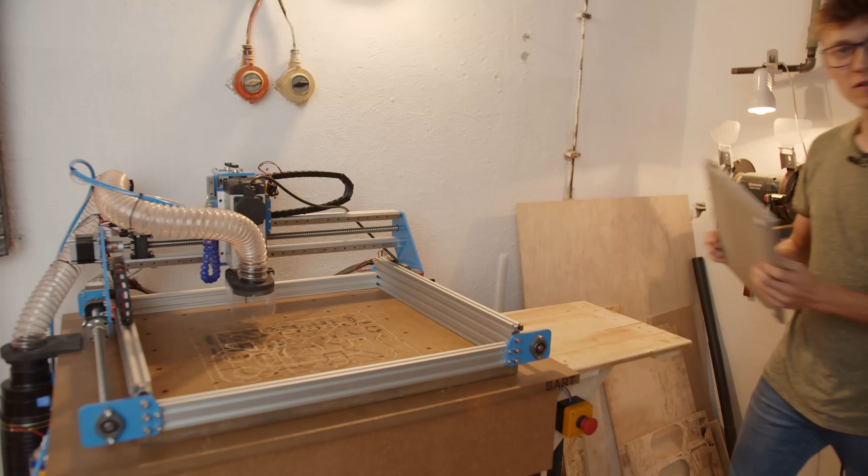A small table for a computer, a WD-40 spraying system, a new huge and powerful spindle, and many other upgrades - that's what I'm going to do in this video.

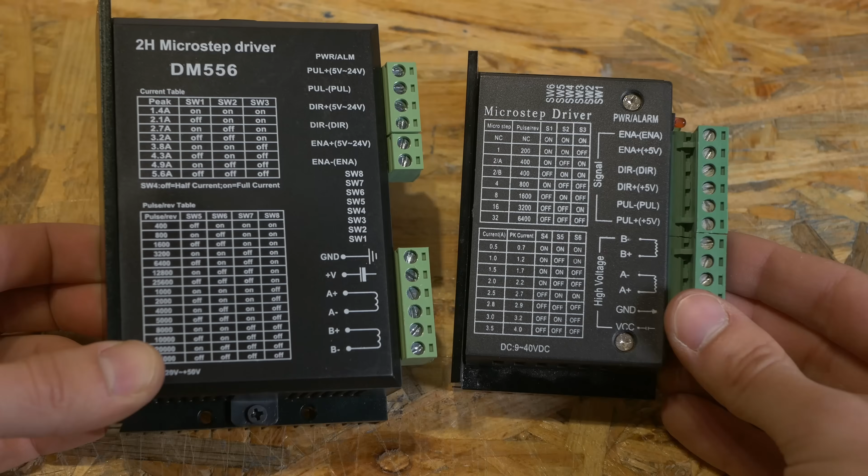All of that started with replacing the 12-volt power supply with 36 volts. A few days after this upgrade, TB6600 drivers stopped working properly and were pretty unreliable, so I replaced them, and after that just started adding a lot of upgrades to IndyMill. That's what I want to share in this video - all those upgrades I added to my machine. I would try to keep this video universal so you can add similar upgrades to your CNC machine, and I will tell you what, in my opinion, are the best upgrades to a DIY CNC machine. As always, you can find all the links to files and things I'm talking about in the description.

I don't really want to get into details why 36 volts is beneficial for a CNC machine and how it changes the behavior of stepper motors, because there is really a lot to talk about. But generally you can use a higher feed rate and also have bigger torque on the motors if you are using a bigger power supply. Of course, keep in mind that the voltage of this power supply has to be compatible with the stepper drivers and stepper motors you are using, and with other stuff on your CNC machine. For example, with these drivers you can go up to 50 or 60 volts, but not higher than that, so 48 or 60 could be a good choice. Also remember that if you have something else powered with different voltage on your CNC machine, you cannot just connect it to 36 volts.

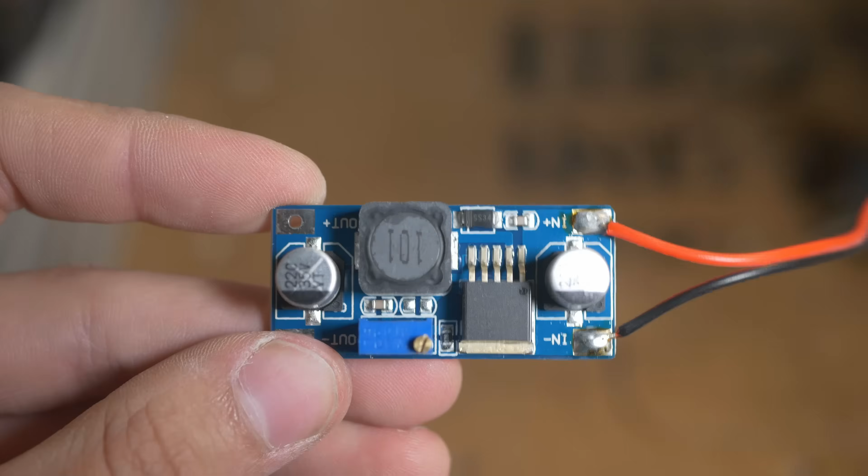For example, I have an LED strip that was connected to the 12-volt power supply, but right now I have the 36-volt power supply, so I added a voltage regulator, and now I can safely power the LED strip and some other stuff in the future.

As I said, 36 volts improves the feed rate and the torque of the motor, so you can run the machine faster. Previously I was running it at 1000 millimeters per minute with the 12-volt power supply, and right now with the new power supply and new stepper motor drivers I can go as high as 2500 millimeters per minute - quite a difference.

I also faced some problems with this power supply after only 3 months of using it. Probably it was connected to the power supply actually being broken, and not me using it improperly - I hope so, because I measured a lot of stuff. I measured the power supply, stepper motors, drivers, and I tried to power the machine with a lab bench power supply.

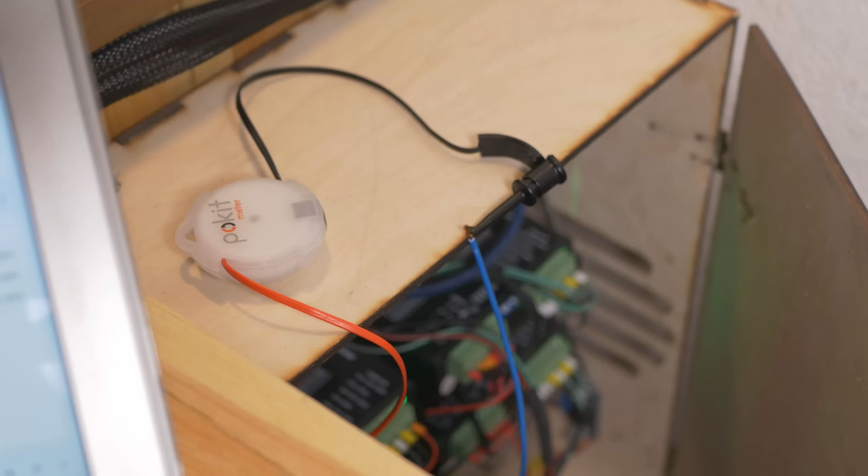Alright, so here you have it on the screen. As you can see, the voltage was almost 36 volts, but once I started machining, it drops to 10 volts and then goes to like 14 and then 10 again - something is definitely wrong with the power supply.

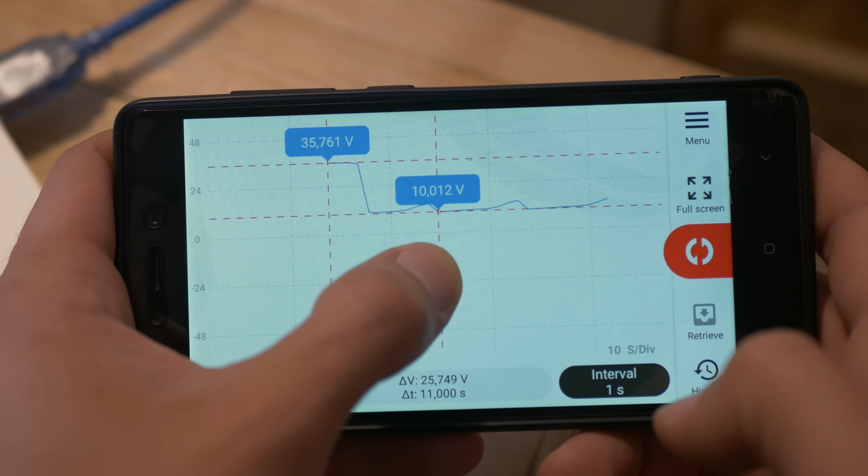So I sent it back to the producer and hopefully they will replace that, but as for now I bought a 36 volt power supply, 16.7 amps, which should be way more than enough for this machine. Previously I was using 11 amps.

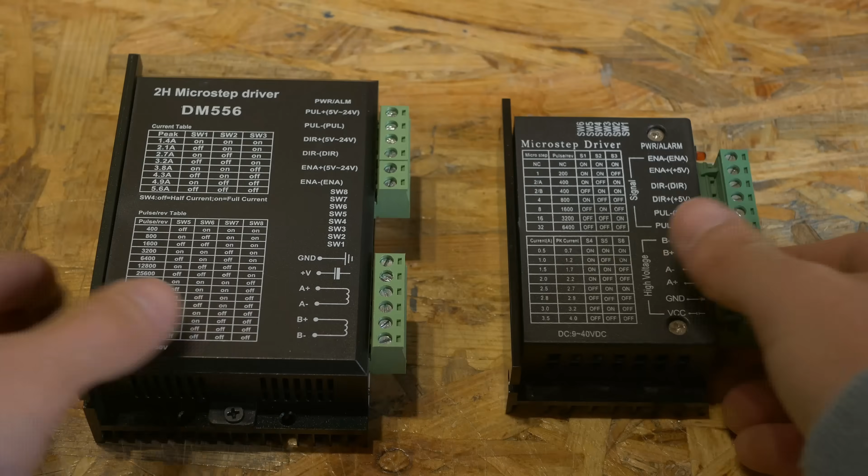For over a year, TB6600 drivers were working fine for me, but right after replacing the power supply, those started to be pretty unreliable and I just wasn't able to use them on this machine anymore, so I replaced them with DM556. Those drivers work fine, they are a lot more quiet.

It is so silent compared to TB6600. So this is the x-axis, and on the y-axis I still have the TB6600 - of course there are two motors so it's a little bit louder, but compare that to the x-axis. The difference is huge, and the connection is basically pretty much the same.

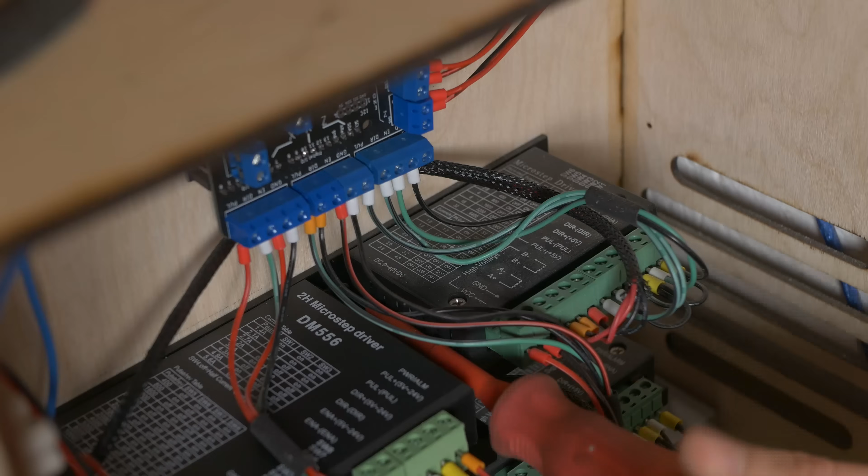The driver is just a bit bigger, so keep that in mind - if you have a small electronics box, that may be a problem. Also keep in mind that this driver can only be powered with voltage higher than 20 volts, so if you have a 12-volt power supply, you cannot use these drivers on your machine. You would also have to replace the power supply together with the stepper drivers.

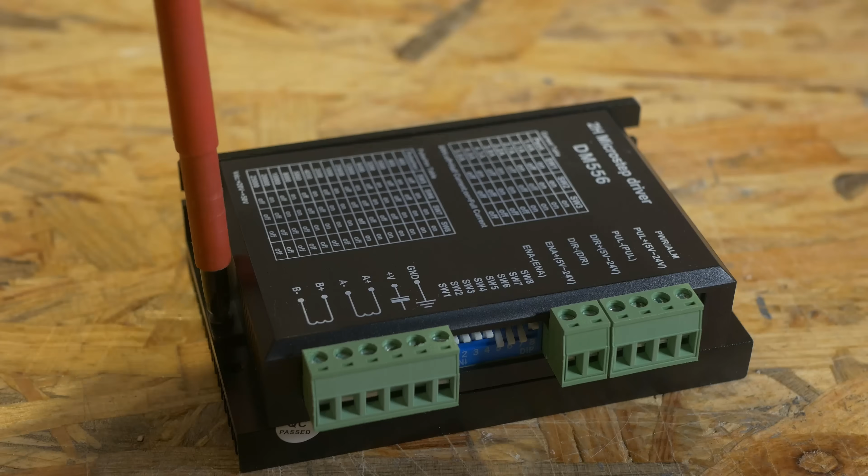So far, after 3 months, the machine is working fine with those drivers and I had no problems at all, and the machine is a bit more quiet. I also decided to take a look inside the drivers to compare them internally, and here you can see that.

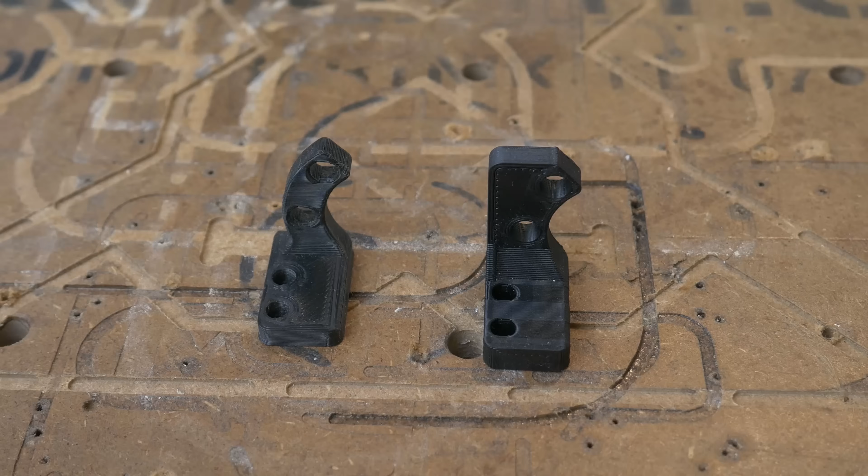When I finally started redesigning 3D printed parts for IndyMill, I realized how badly I actually designed them. There was just so much to improve. I designed and printed a few experimental parts.

Once I was happy with the results, I released those on Indystry and my GitHub. On GitHub you can also find both STL and step files in case you want to modify something. I also started selling 3D printed parts on my Indystry store, so if you want to build IndyMill but don't have a 3D printer, you can just buy those 3D printed parts and build yourself an IndyMill and support my work. Oh, and I totally changed the ball screw block design.

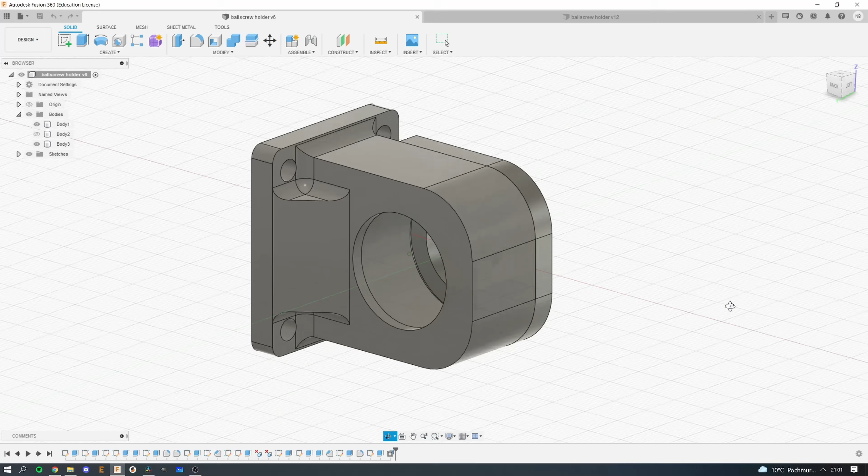Now instead of thrust bearing there is an additional ball bearing and printed flap. It is much stronger and works as it should, unlike the previous screw block design, because that was just such a terrible idea. Let's just pretend that it never existed.

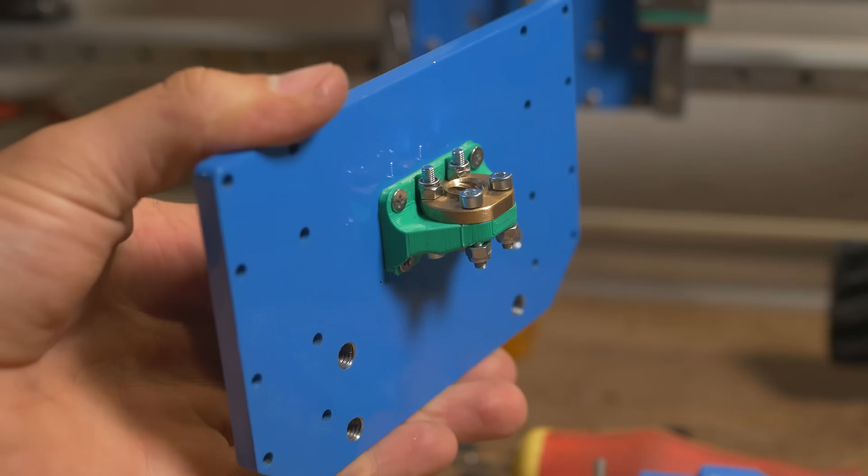One thing worth mentioning is that 3D printed parts are surprisingly strong and definitely strong enough for such a CNC machine. Sure, making those parts out of aluminum would improve the machine a bit, but not really as much as some people may think. And also keep in mind that I'm not trying to build the one and only heavy-duty, big, powerful CNC machine right there.

I'm trying to share with the world a CNC machine that is cool, easy to build, and considering what it can do is still quite affordable. Balancing all of those things at once is definitely not an easy thing to do, but I'm trying my best.

That's how I have been using my CNC machine for a very long time. An old chair, my computer, USB cable and a pretty uncomfortable position.

I have been overthinking this design and over-engineering it in my head for a very long time, but finally I decided to do it the simplest way possible, just a fixed table made out of wood, but firstly I had to add wooden panels to my CNC table.

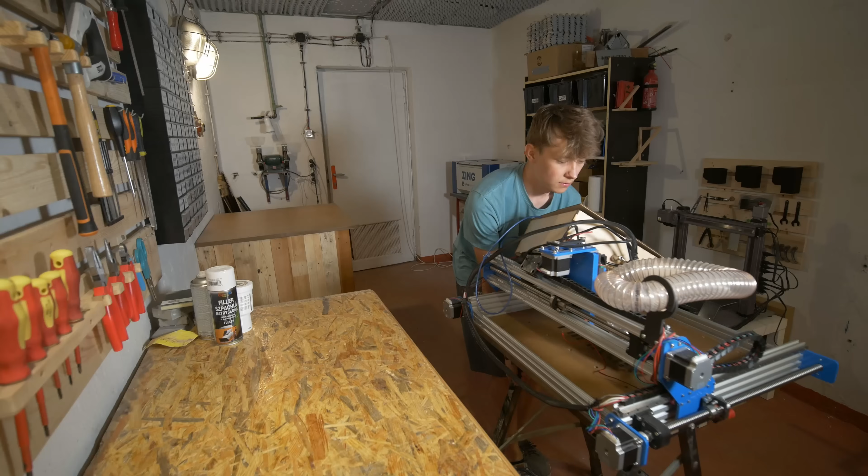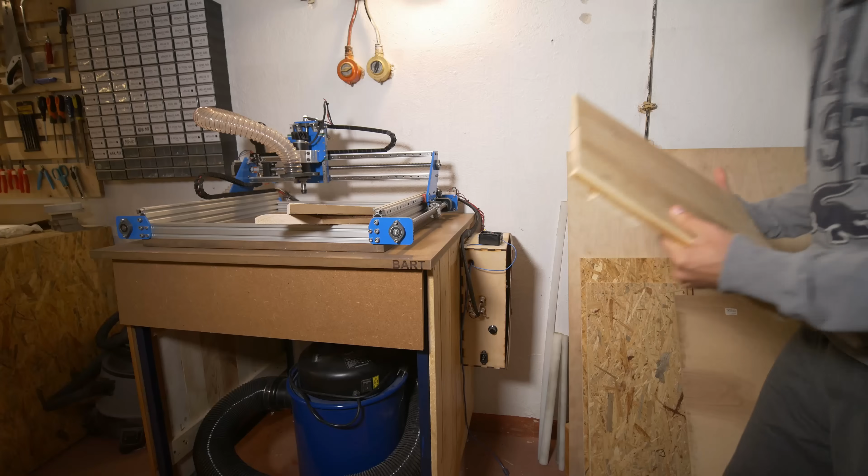And the table for the computer is ready. It will go right here like so, and then with those two wooden pieces that I cut at an angle, I will just simply support it that way, one here and one in the back.

Also to one of these angled pieces I will attach the safety switch that used to be right here, but it is not really that easily accessible now with the table in the front. So yeah, this is definitely a better place for a safety switch.

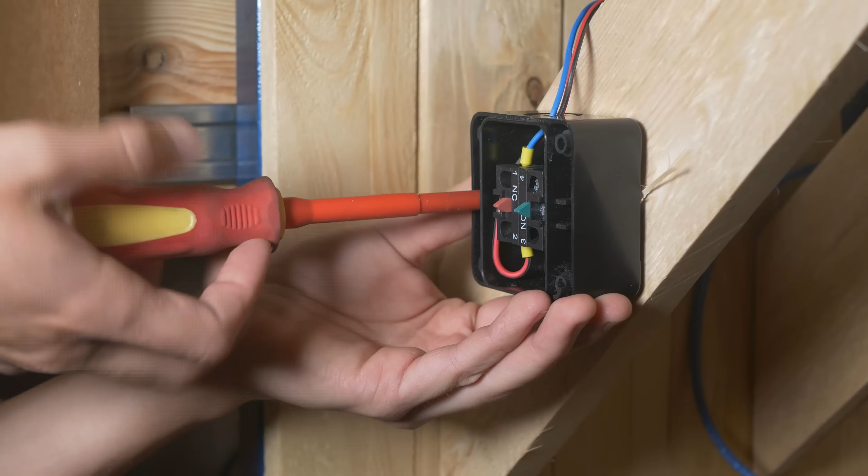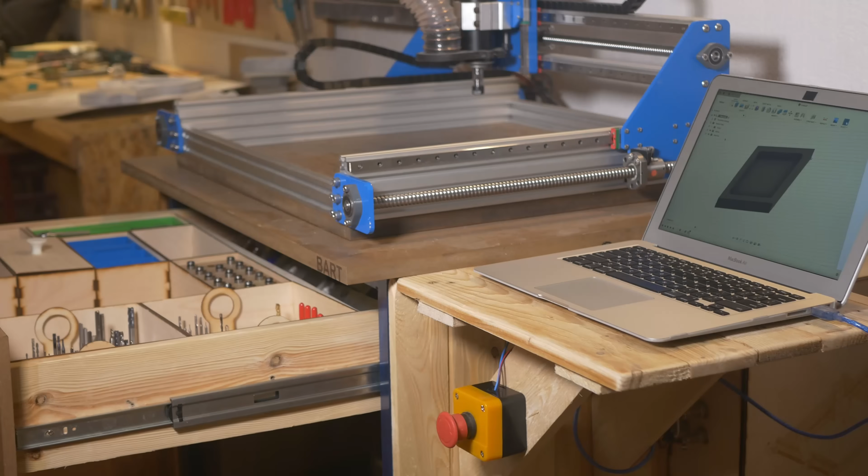I am way more happy with this table for the computer than I should probably be, and I'm not really sure why I waited so long to actually build this thing, because using the computer on a chair that was standing right here was not comfortable at all, and this thing is just so simple yet so amazing and definitely a great upgrade to a CNC machine.

As you can see, I already prepared a piece of wood, everything is set up, and I just want to machine something cool just to see how this kind of wood will work with a CNC.

Also I want to see if actually the dust collection system will be enough to keep the computer that close to the CNC machine clean, and if not, I will just grab this piece of plywood, cut it somewhere there and create some kind of a wall that will protect the computer from wood dust and aluminum chips and stuff like this.

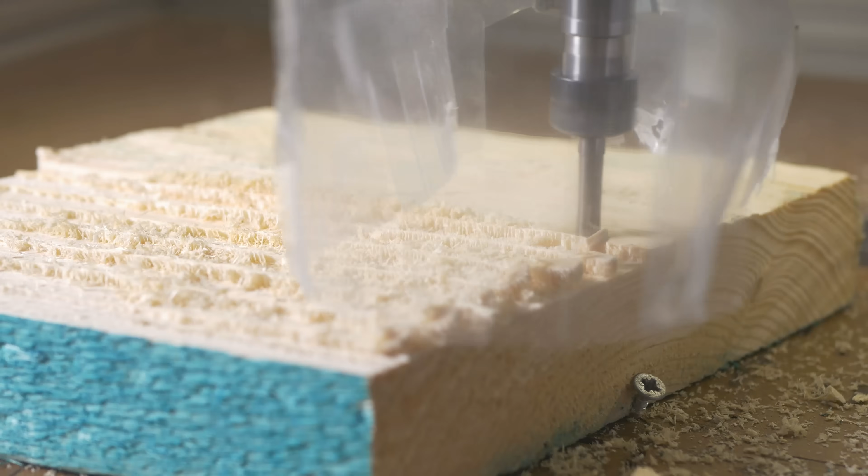It is incredible how such a simple thing can improve the user experience and overall comfort of using the CNC machine. This is 10 out of 10 upgrade, totally recommend that.

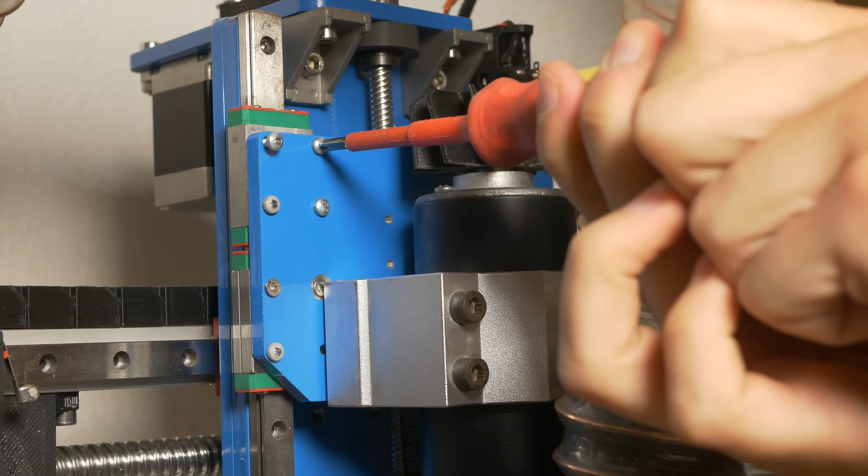Adding a closed loop coolant system to this kind of a CNC machine is probably an overkill, but helping the chip evacuation with compressed air and sometimes some WD-40 is definitely a great idea, and that's why I got this flexible nozzle that I can easily attach to the spindle plate.

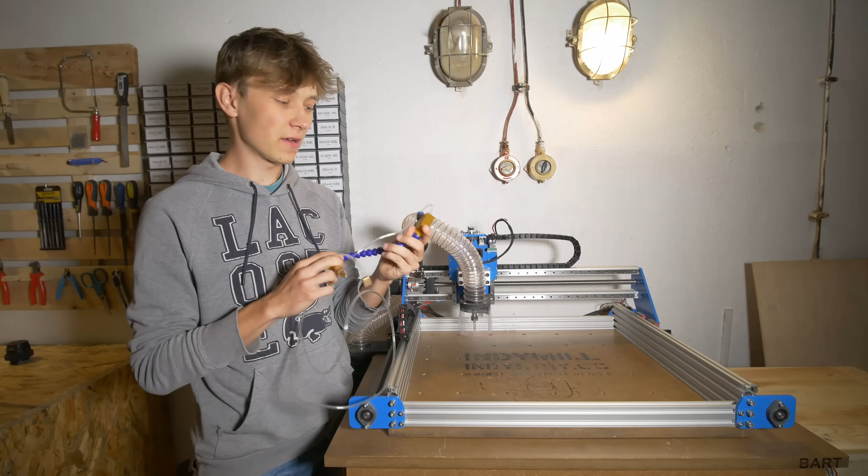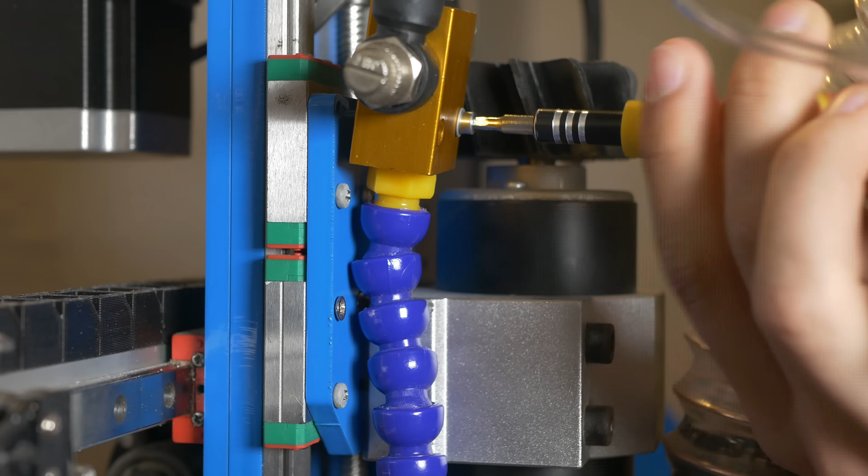Quite fortunately, the distance between those two holes is exactly the same as the distance between the screws on the Z-axis plate, so I can just use longer screws and attach it to here. And if you have a different machine and there is no such place where you can just attach it with longer screws, you can machine some kind of an adapter or even 3D print some kind of an adapter or drill holes in the metal plates and attach it wherever you want.

And then with 8mm pneumatic hose and a valve I can connect it to my air compressor that's honestly a bit too small for that.

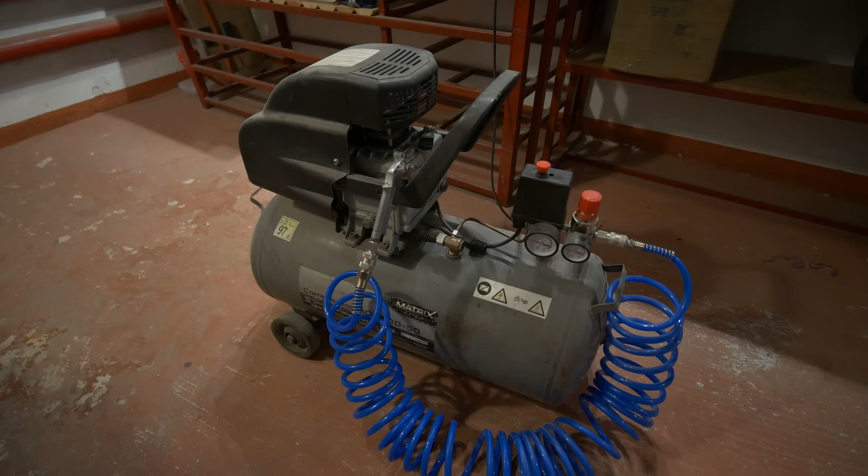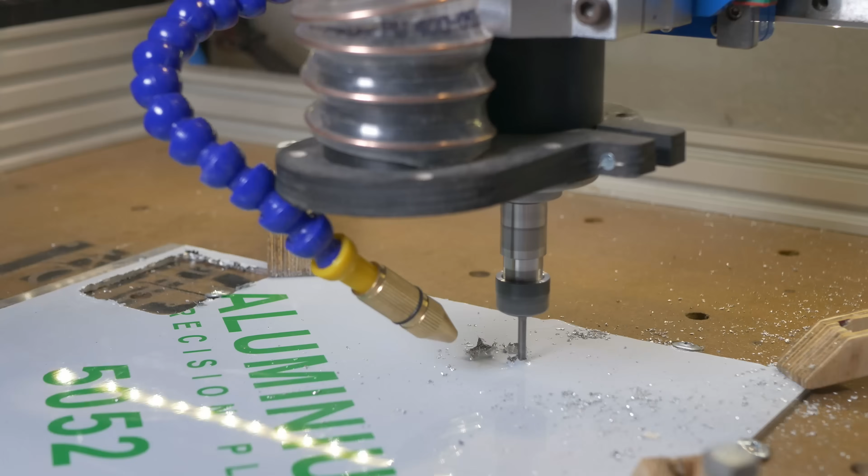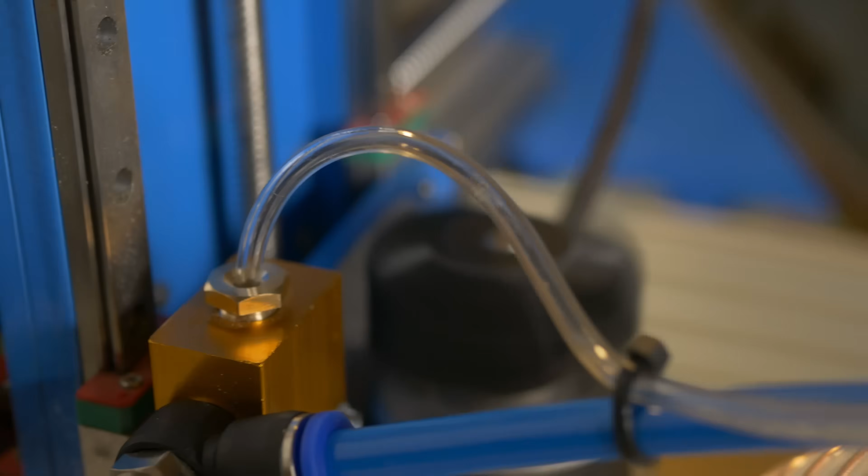To test it, I made a filament spool holder for my CR10 on IndyMill because I actually lost the original one, and the air assist really helps a lot while machining aluminum. I also noticed that I can easily and safely apply WD-40 like so when needed, so I designed a 3D printed holder for that, and now with just one click I can spray some onto my material.

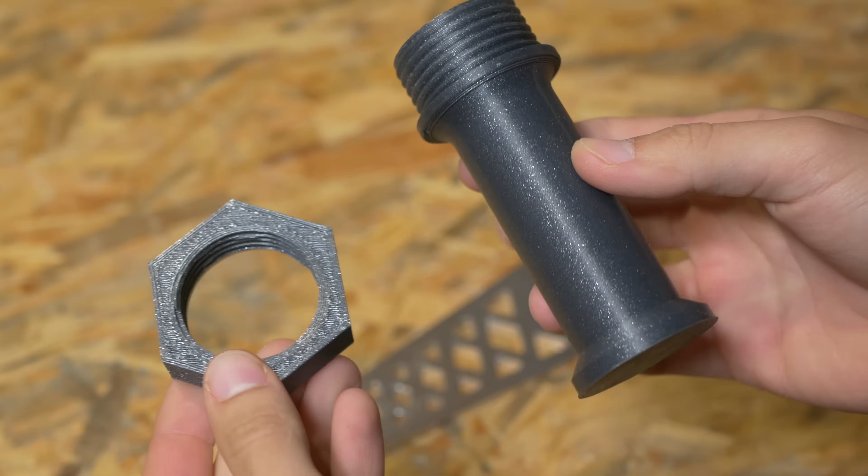Controlling the spindle with GRBL. I got so many emails, comments, and questions about that, and yes, of course it is possible, but first you need to convert the PWM signal to an analog 0 to 10 volt signal, because it should be 0 to 10 volts, right? Obviously it should be, and the problem is it's not, it's actually 0 to 5 volts. I should have checked that in time, but I didn't.

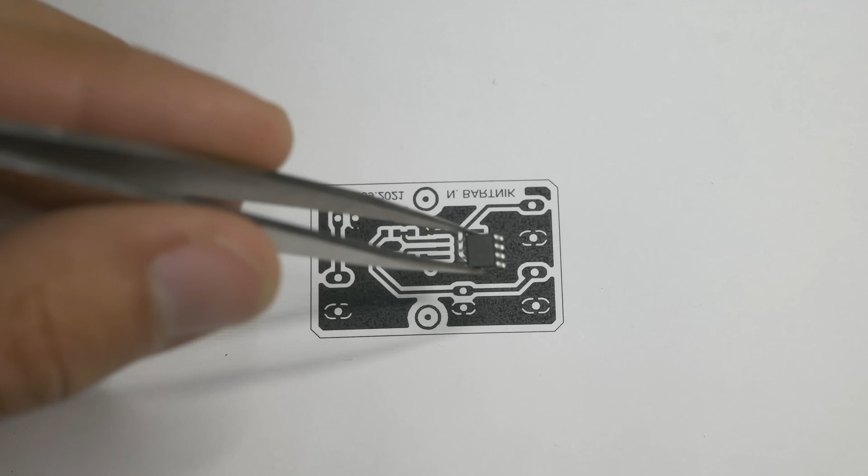This time I had no time to actually order a professional PCB, so I just made it myself. Here I'm cutting the transfer paper that is used to make the PCB, and sticking it to normal paper. That's how I usually make my PCBs. I'm printing, and as you can see this one failed, and this one failed too, so I tried again, and that one failed too. I tried a lot of times, unfortunately without success.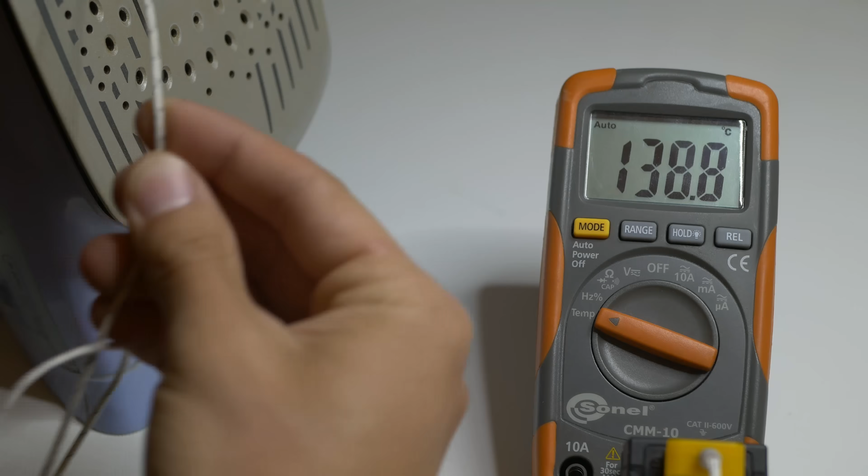Finally, somehow I got it to work as it should, so I grabbed a piece of PCB laminate, and that's how I'm preparing it for transferring with the iron. Here I am precisely placing the PCB on the laminate, and I also measure the temperature of the iron to make sure everything is fine and that this PCB will actually work as it should.

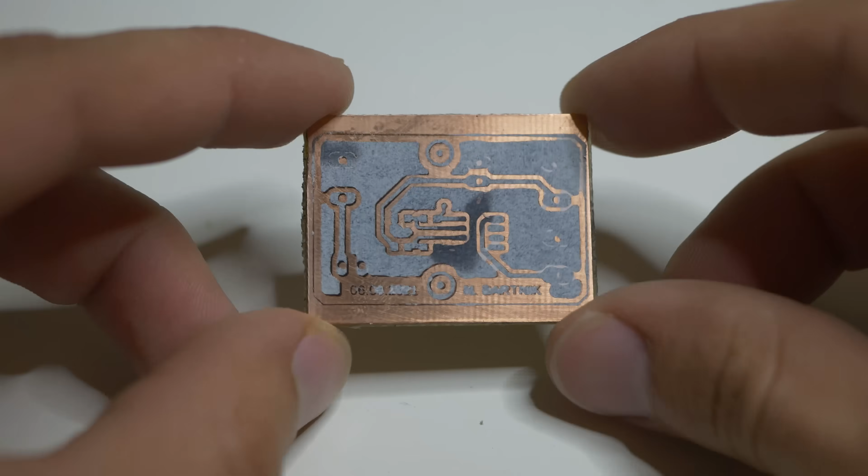Here I am ironing that, and after ironing it's usually a good idea to use some water to take off the paper from the PCB. It's not really beautiful and perfect, but it should be fine, since there are no super small SMD components. Here I am cleaning some paper, and now etching time.

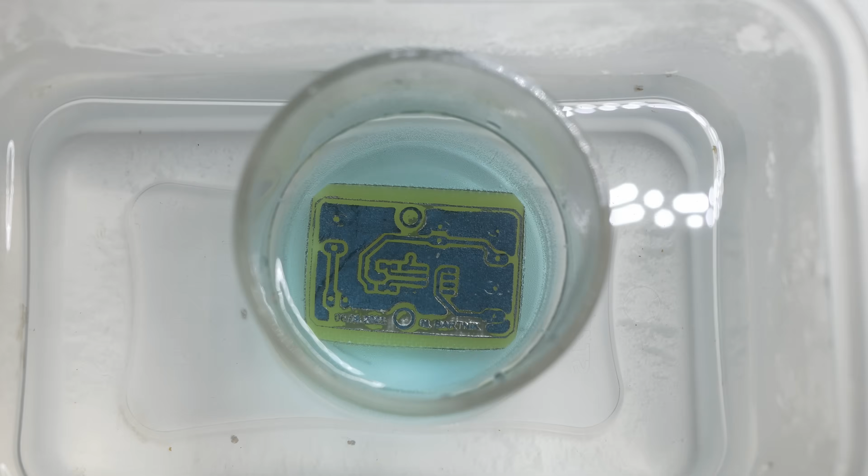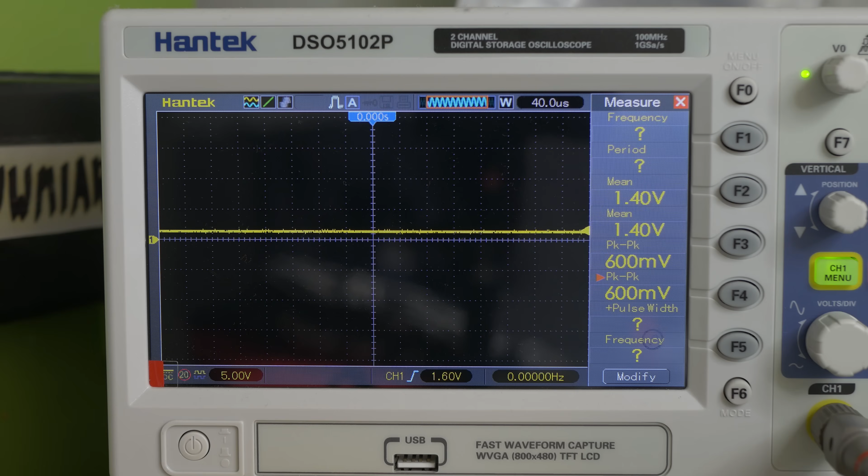And then of course some soldering. Here is my testing rig. I connected that to the GRBL shield and the Arduino so that I can control it through CNC.js, and I also connected it to the oscilloscope to see if the voltage is fine and if everything works. As you can see, we have a very stable analog signal and we can go up to 10 volts, which is great. The PCB is working fine.

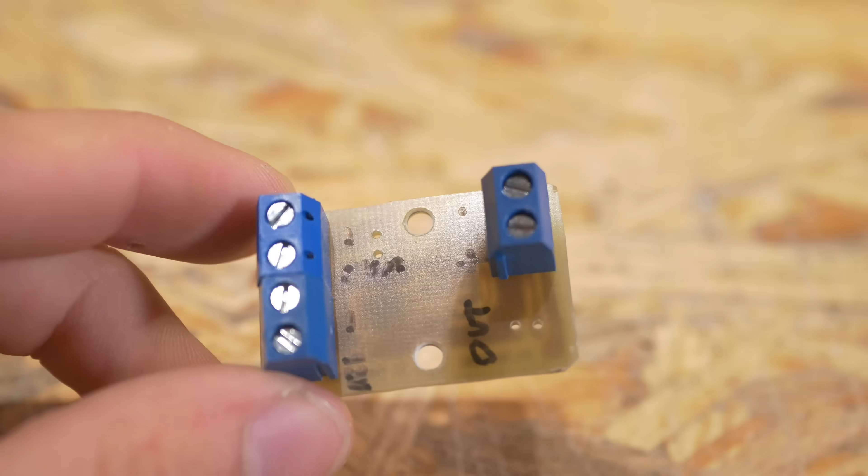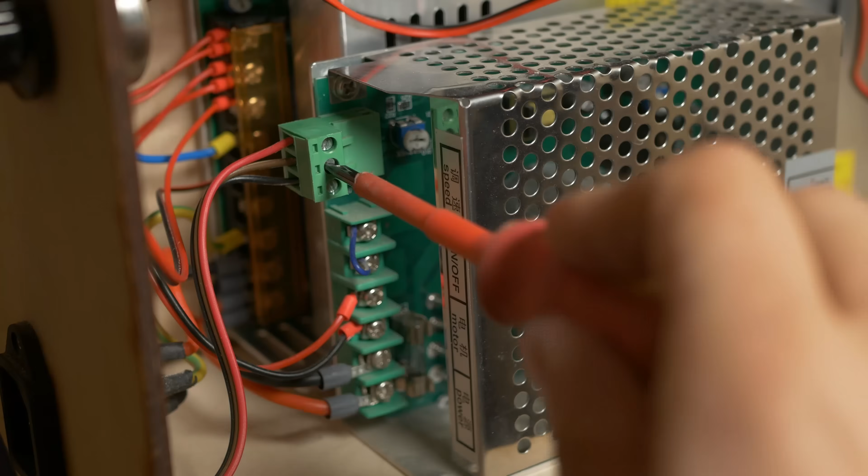I also drilled holes in the PCB after soldering because I had drill bits at the workshop. Usually that's something you want to do before soldering, obviously. Then I fixed the PCB to the electronics box with 2 screws and connected everything. I connected it to the power supply of the 500 watt spindle, to the GND and signal pin where the potentiometer was connected, and then did a quick test.

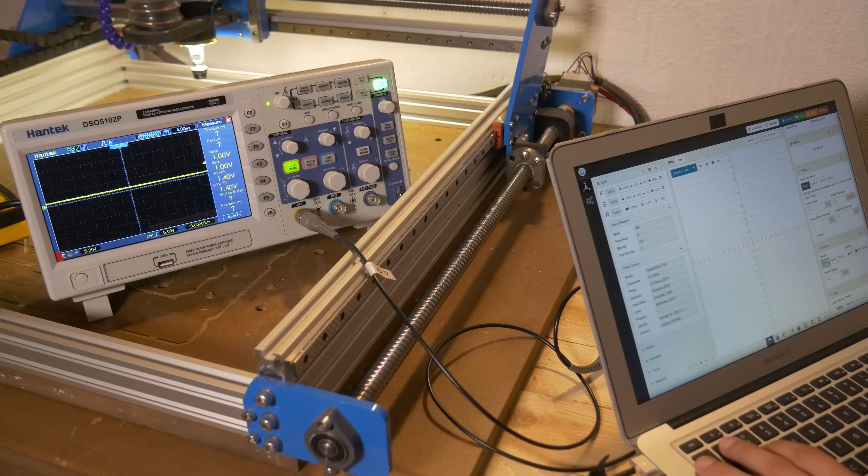Actually I noticed a problem right here because the 500 watt spindle seemed to be a bit more powerful than it was before, so something was definitely wrong. Later I found out that it is actually controlled with 5 volts and not 10 volts as I thought. So here I am testing it with the oscilloscope again to see if everything is fine with my PCB, and it was. Then you can see a blink, and that's how I blew the fuse of the 500 watt spindle, and I had to buy a new one.

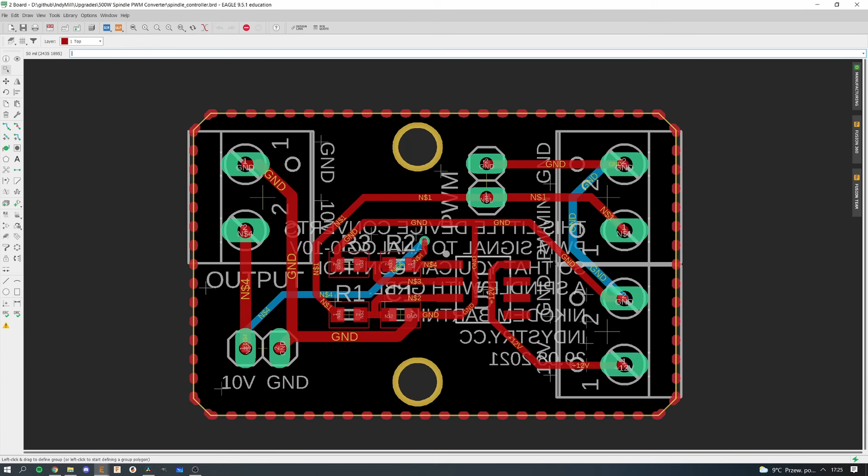After blowing the fuse I had to stop the tests, but I was really happy that my PCB was working fine, and on GitHub you can find all the files if you want to make it on your own. Here is the schematic, very simple, and here is also the PCB layout, also very simple. I'd say this thing is still a work in progress, even though it's already working for spindles controlled with 0 to 10 volts, and modifying it for 0 to 5 volts is just a matter of changing one voltage divider.

I will probably make a separate video just about this PCB, because even though it's simple, it's also a pretty nice circuit. You can find all the files on my GitHub for this PCB, and maybe at some point in the future it will also be available on my store.

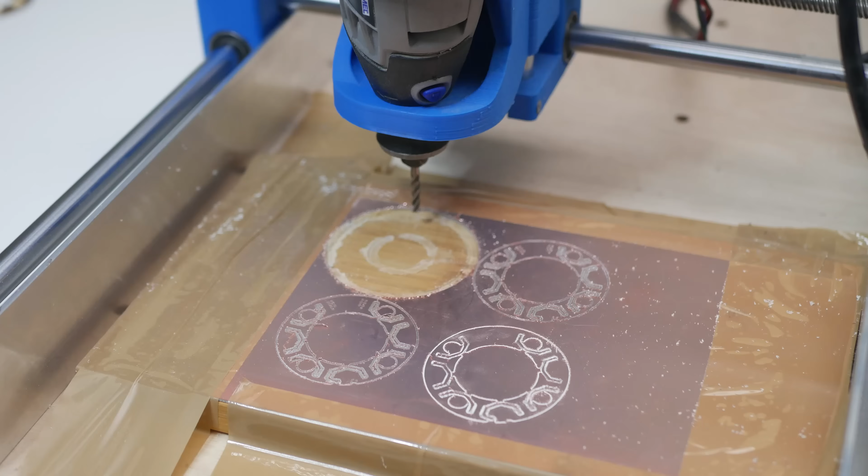And now another PCB. No one actually asked for this one, but I thought it would be cool to have more light around the milling bit, so I made a 500 watt spindle light. Unfortunately, I forgot to record how I'm making this PCB. I made it actually on the Dremel CNC and it was fun, but took a few tries.

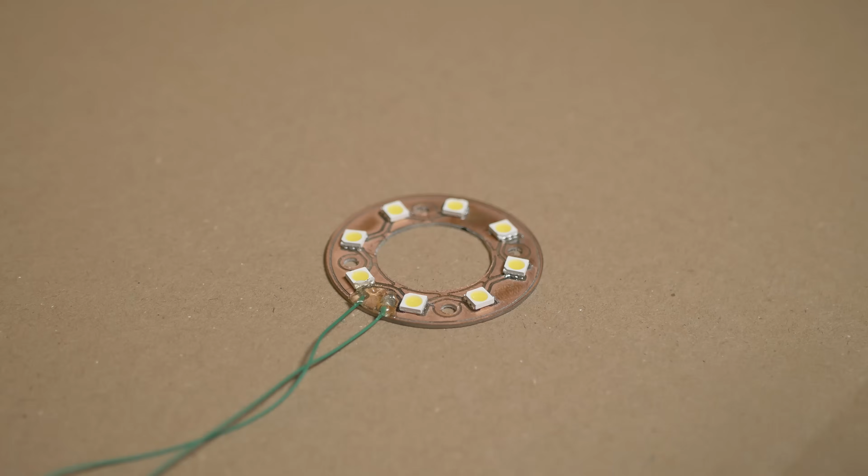Here is the final soldered PCB and it was glowing on the first try. I'm protecting it with this spray varnish because there are flying aluminum chips and stuff. Here are some prototyping notes, and I soldered 2 very long cables to it, then with M4 screws I screwed it to the spindle from the bottom.

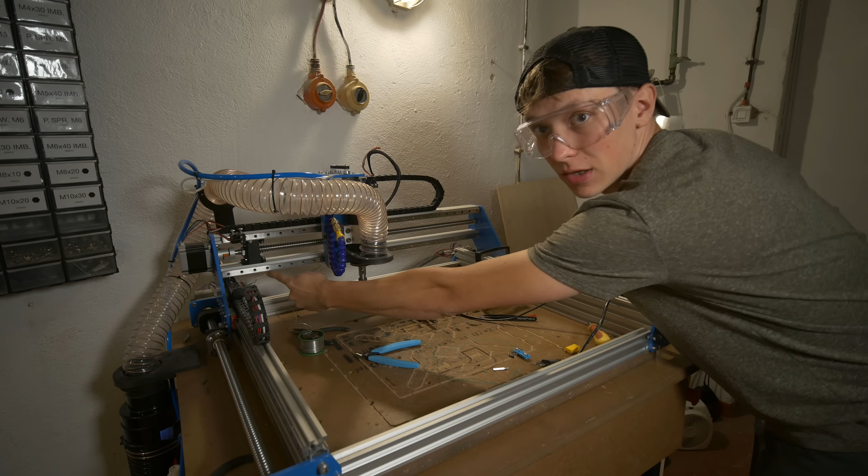Spindle LED ring is installed, and I also went with the cable through the cable chain and soldered it to the LED strip that is below this aluminum profile. That should work already, but it is not really tested yet, so let's test it.

And it works! That is great, so much light right now, and you can easily see the spindle and the milling bit and what it is doing while it is doing. You can also grab the dust shoe and attach it, and you still have pretty nice light inside here.

It's just a simple PCB with 8 LEDs, but anyway I will probably make a video just about that because I have an idea for an interesting experiment that I want to try. Files for this PCB are available on my GitHub, and maybe this PCB as a complete product with LEDs already soldered will also be available on my store in the future.

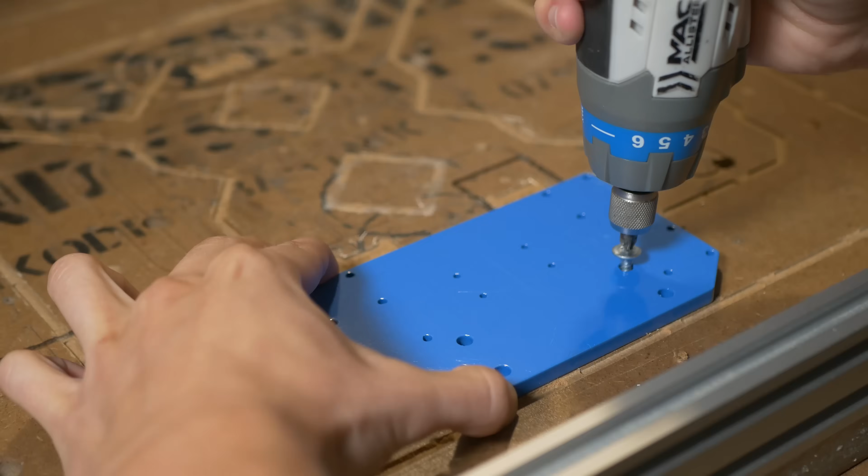And finally, an upgrade that everyone was waiting for, including me, a 1.5 kilowatt spindle. First I had to prepare the spindle plate, and I used the 500 watt spindle plate. I attached it to IndyMill, fortunately before blowing the fuse of the 500 watt spindle.

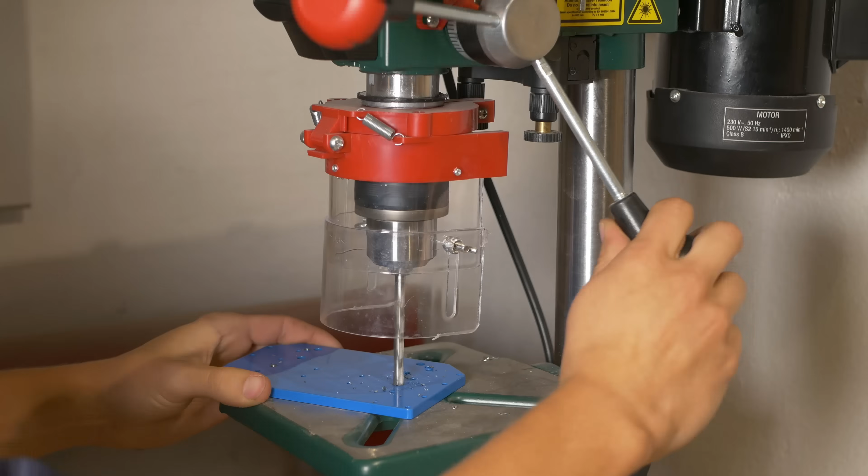In Fusion I prepared what you can see here, and with this milling bit I marked the holes. I decided not to drill them because drilling steel on IndyMill is probably not the best idea, so I just marked precisely where the holes should be. Of course you can do the same on a drill press and just mark them precisely with a caliper or a ruler, but this was easier for me. Here I am drilling those holes on a drill press.

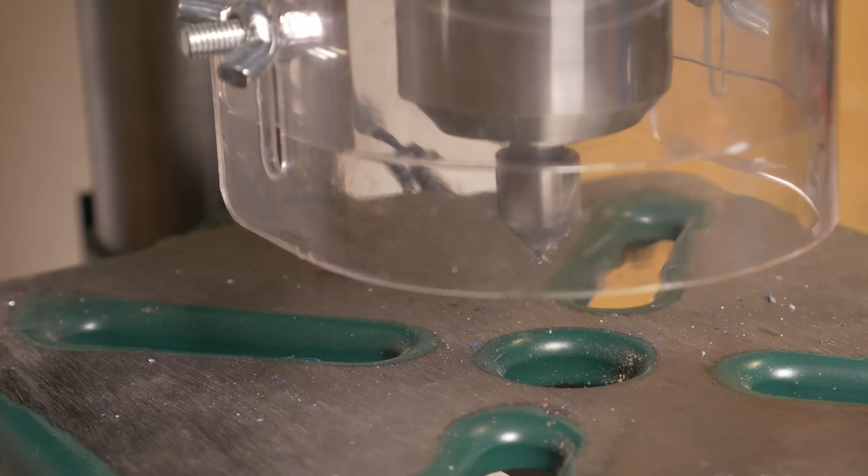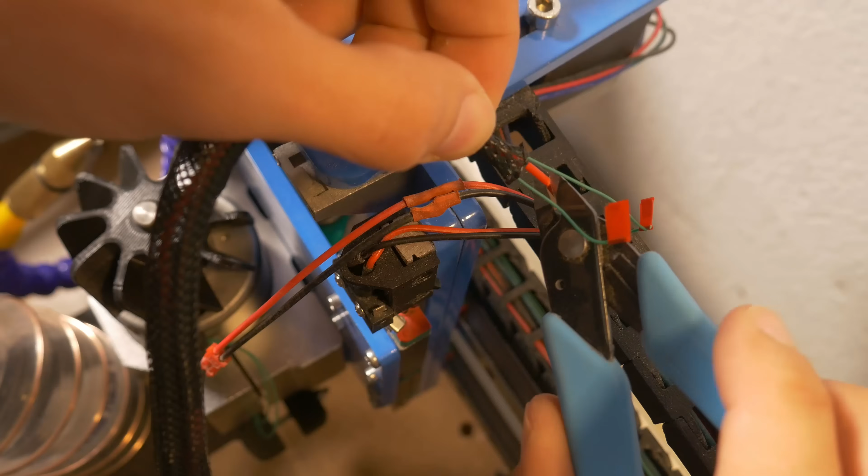Then with this weird drilling bit, I'm not sure what it's called, I drilled the hole like so, just so the head of a screw will hide in the plate. That's important because this spindle is quite big.

Now I'm cutting the cables for the 500 watt spindle, and I also soldered an XT30 connector right there, just so I can more easily replace the spindle if I need to in the future.

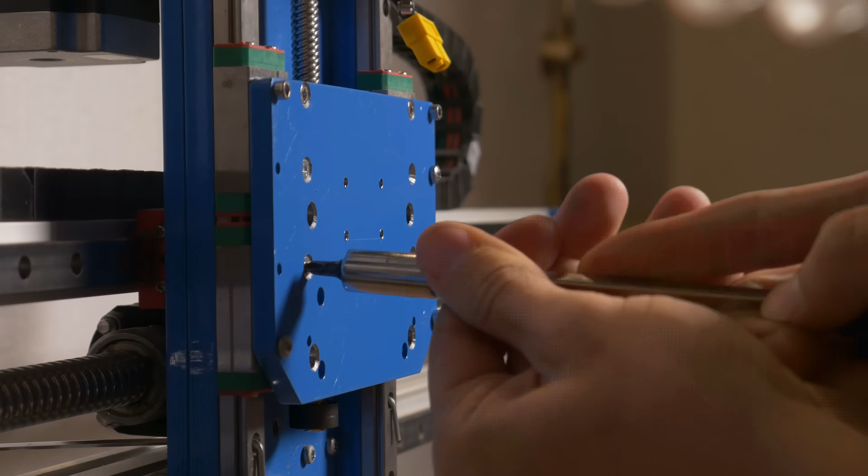Here is the new plate with the 3D printed mount for the nut, and I'm screwing it back to the linear rails. To screw the 1.5 kilowatt spindle in place I used M6 16mm long screws.

You also need an inverter for this spindle. Usually you can buy just those two pieces combined in a kit, and this is how it looks. Here you can open this flap, and there you need to connect the cables.

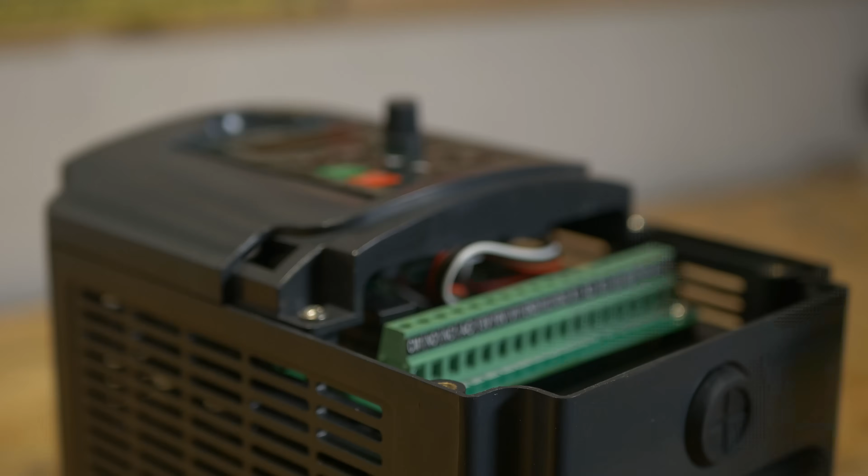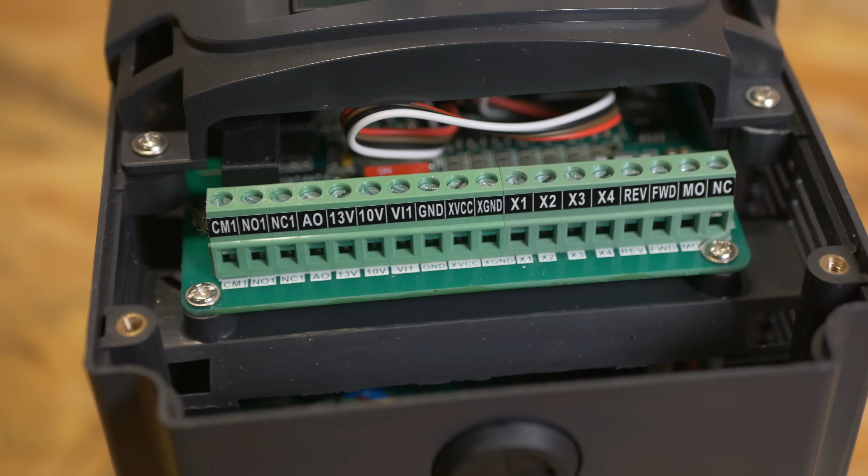On the bottom you have to connect the 230 volts and cables for the motor, and on the top you have some control pins. I'm not really sure how to use them yet. I have to figure that out and somehow connect it to GRBL. Everything there is nicely labeled, so it's quite easy to connect.

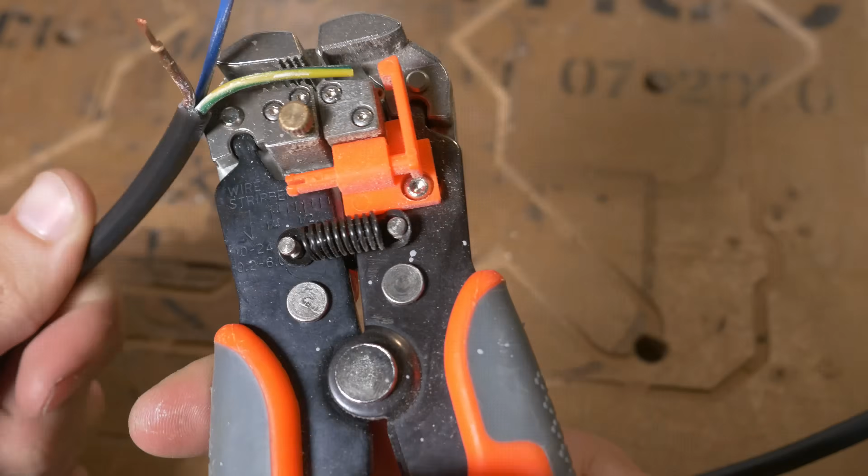To connect this spindle to the inverter, we have to unscrew this plastic piece and then go with the cable through it so we can later attach it safely. Of course we have to take insulation off the cables and then attach those 3 wires to the spindle, then put the plastic piece back in place and screw the nut on top.

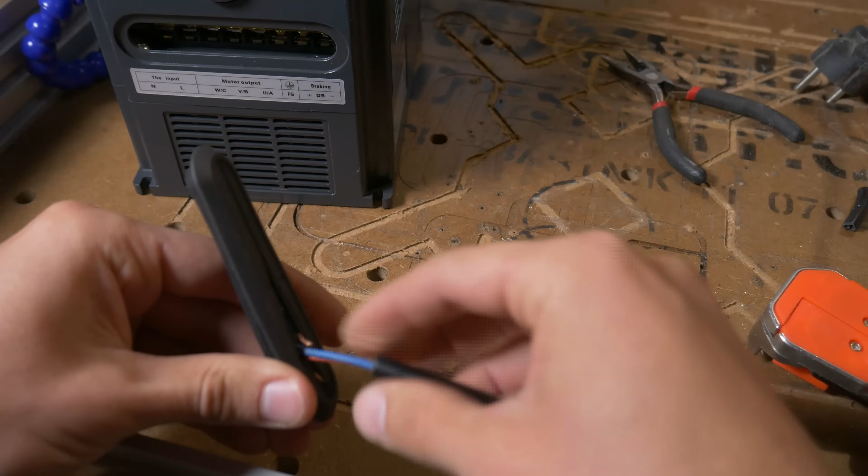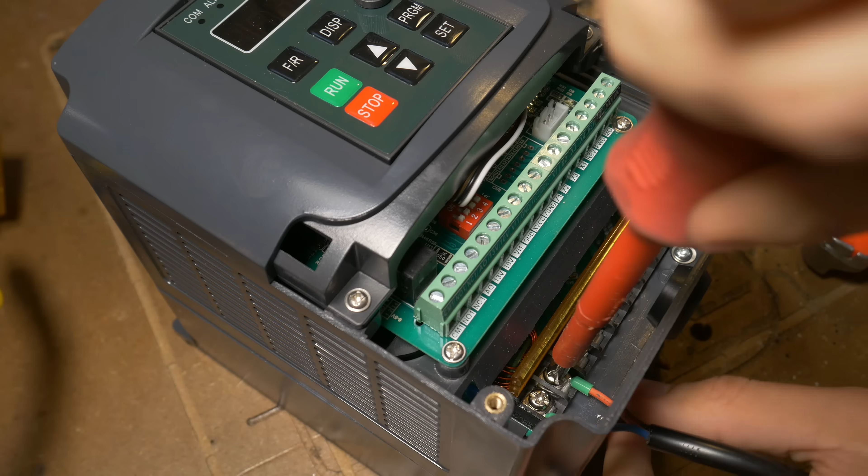The other side of the cable has to be connected to the inverter. First you go with it through this rubber piece, and here I am connecting the 230 volts, the L and N. If you are not sure how to do this properly, ask for help because it's dangerous stuff, it's high voltage. And here are 3 cables for the motor.

And here's the first test. Actually it was working very well and there was no problem at all with it.

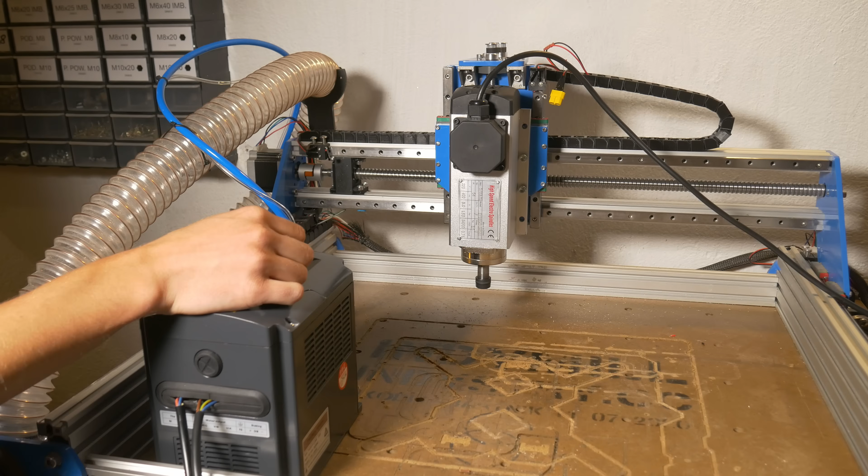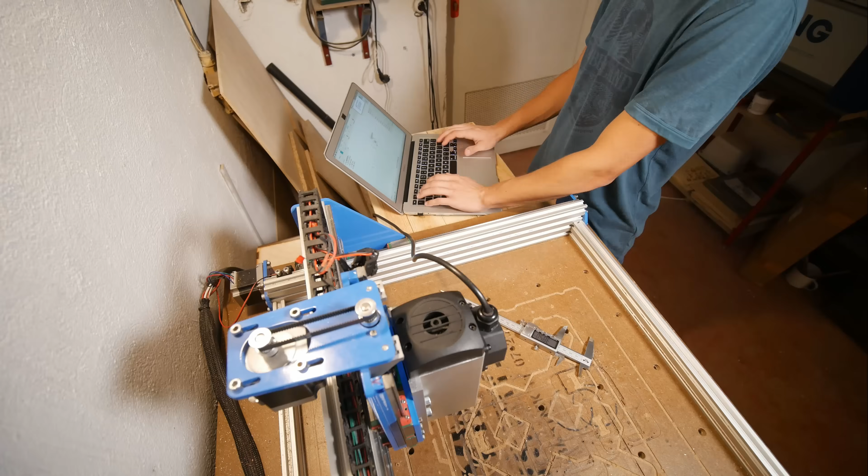Of course you can attach the inverter to your CNC table, and I also wanted to attach the coolant nozzle right there, but right now it's not possible, so I designed a small plate that I wanted to make out of aluminum, and I installed the milling bit to mill something for the first time with the new spindle.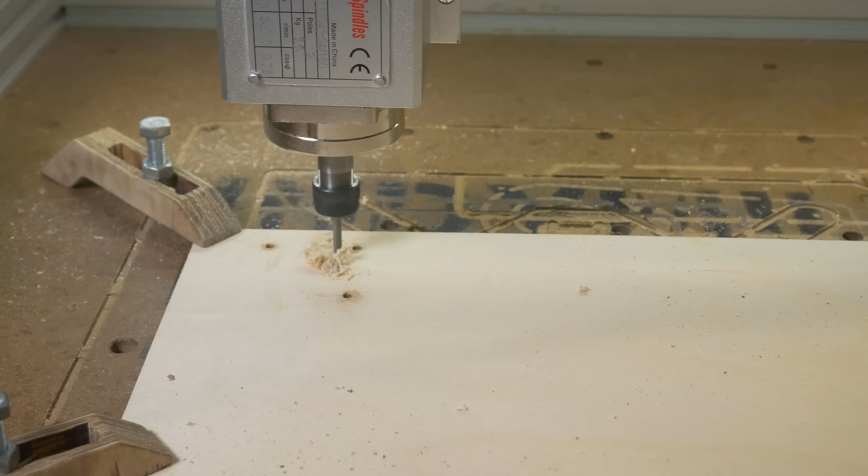I actually faced a problem, because the sound was just terrible, vibrations, the aluminum was really hot, and I had no idea what the problem was. So I tried again, I broke the milling bit, and then I moved to plywood just for a test, and it was bad too. I'm a bit sick right now, so that may explain this small mistake, because I forgot to check the direction the spindle is spinning in, and it's spinning in the wrong direction.

So I was trying to cut aluminum and plywood with the spindle going the wrong way. For some reason it was actually successful for the plywood, kind of, and almost successful for the aluminum. That explains why the aluminum was overheating so much and why the plywood was so hard to cut. So now I will fix this simple error.

Fortunately it's just one button, and I will try again. I know it's a really stupid error, but it took me some time to actually figure that out. Fortunately it was just about pressing one button on the inverter to fix that.

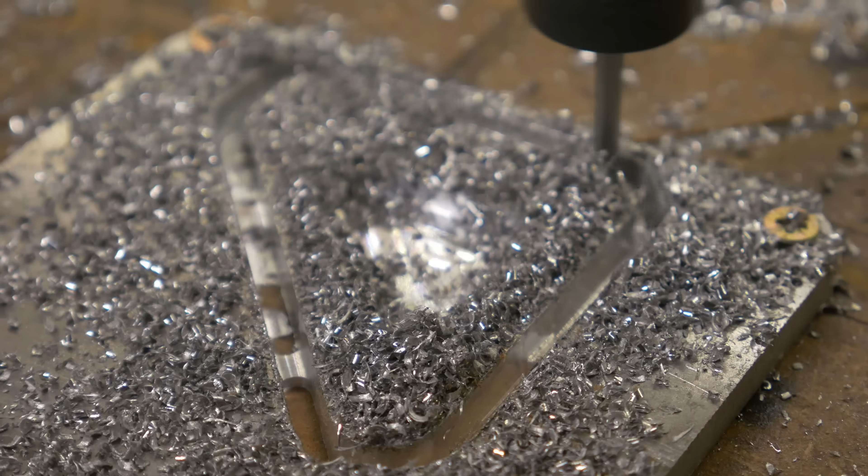Finally it was not only successful, but it was extremely easy to machine aluminum. I felt pretty confident and I achieved a pretty decent feed rate and really nice depth of cut, and the final result was actually, I think, great.

Here you can see it, after cleaning of course, and well, it looks great. It took like 3 or 4 minutes to machine this piece.

Thanks to this simple aluminum part, I can attach the coolant nozzle easily to the spindle, and here I am attaching the dust collection system with duct tape to machine the dust shoe for this 1.5 kilowatt spindle.

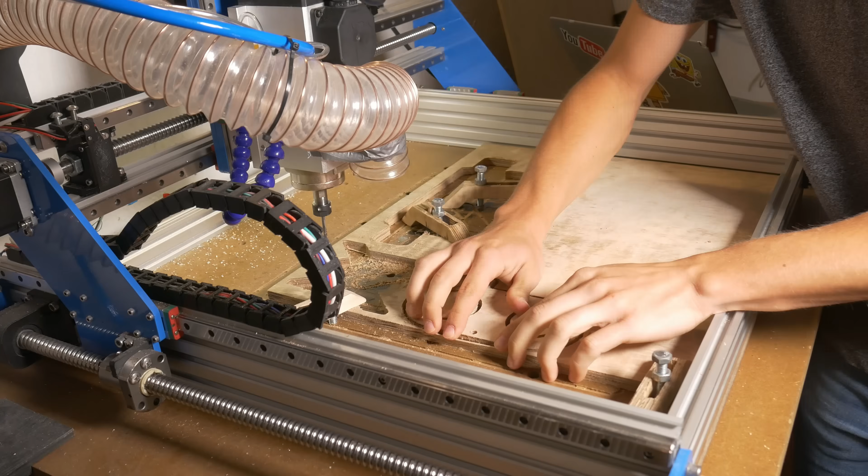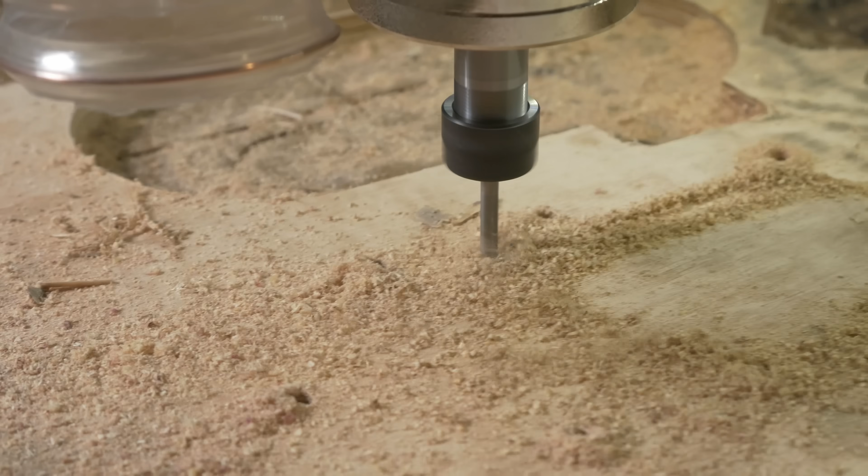Basically it's just 10mm plywood, a 2-part piece with some magnets to attach it, and I painted it black to just make it look cool. And here I will put in place all the magnets.

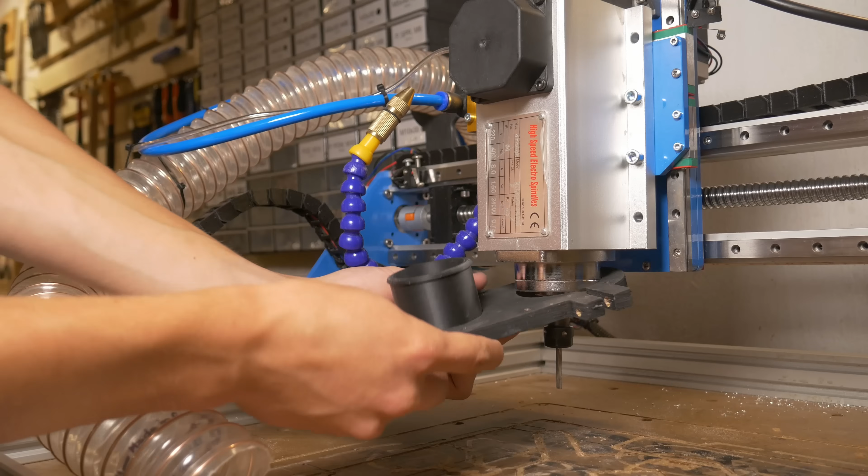And here you can install the hose. This black part is 3D printed. And here is the bottom part of the dust shoe with the skirt, and you can just put it in place with the magnets.

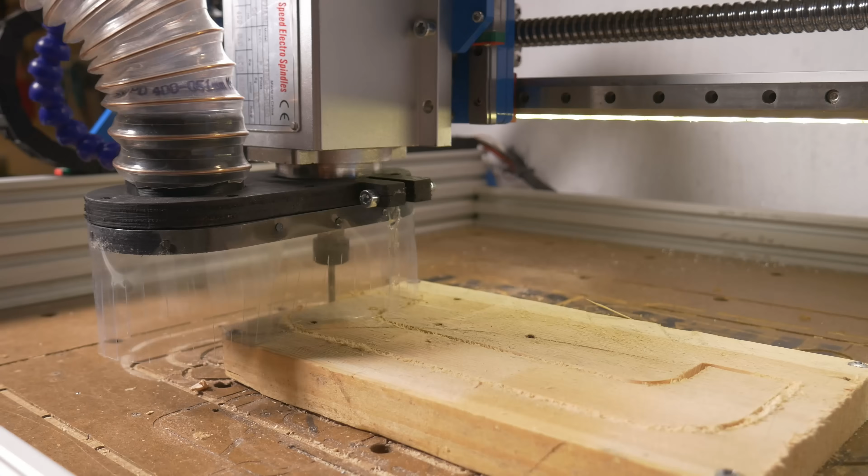This is just a simple last milling job for this video that I decided to make because I needed a handle for a drawer that I'm building, and I made it just to test the dust collection system and see how everything works so far, and it works great.

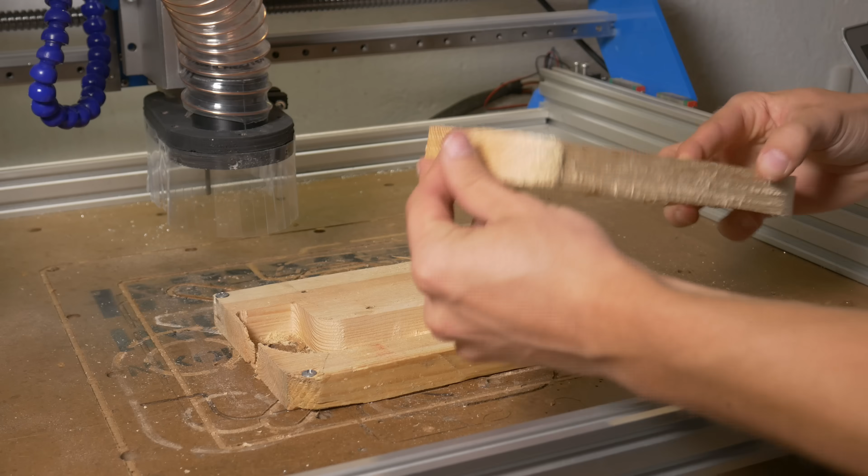As you can see, there is not really a lot of dust on the machine and we have a nice handle for the drawer. I was waiting with this upgrade for so long because I actually wanted to show in my videos that the 500 watt spindle is pretty capable.

And that you can do actually a lot, and for some people it may be a good choice, especially for beginners, and I still think that's true. But 3 times more power and overall better quality is really making a difference.

So in the end, to summarize, what are the best upgrades to a CNC machine in my opinion? Of course it all depends, and some upgrades that didn't really work for me might totally work for you. I decided to divide the upgrades into 3 groups and also consider upgrades from my previous videos.

The first group is upgrades that you really need, must-haves, that either improve the safety of the machine or overall greatly improve how the machine is working. That's obviously the power supply, stepper motor drivers, 3D printed parts, safety switch, and some other stuff.

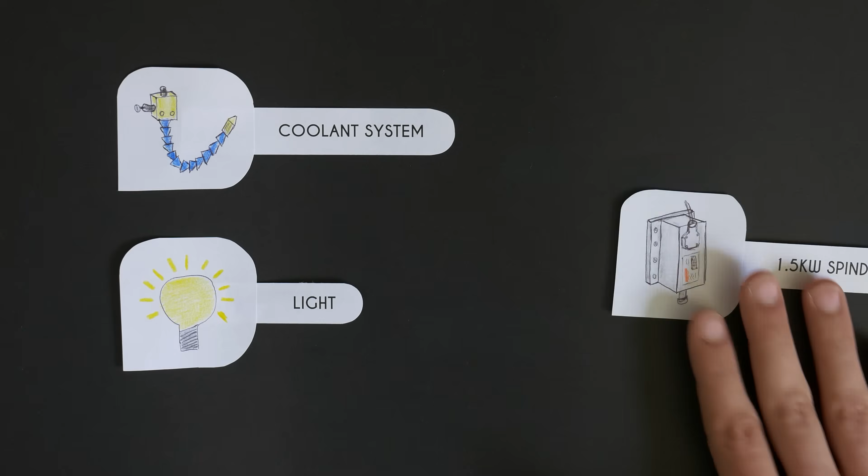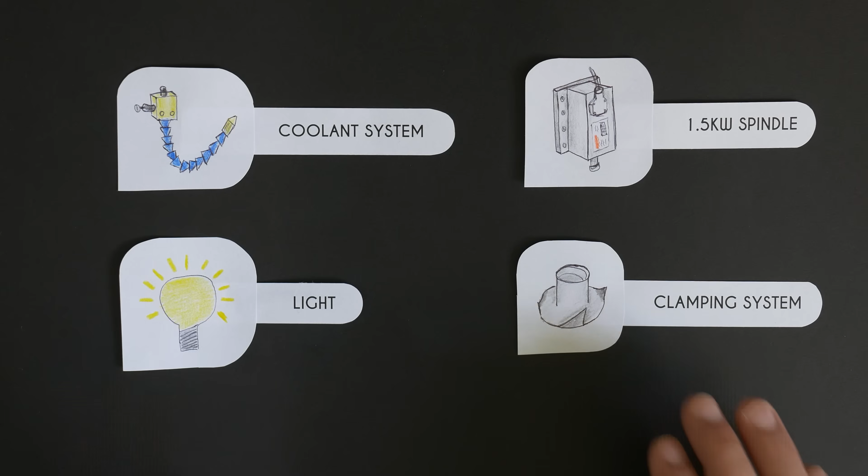Then there is some additional stuff, things that are really cool to have, but you don't really need them to machine something. That's, for example, some additional light, like the LED strip or the spindle light, the coolant system that is great but you can still machine aluminum without it, the clamping system which is actually pretty useful, and the 1.5 kilowatt spindle, which is super powerful and great to have, but still the 500 watt spindle is quite capable and you can do a lot with it.

Then there are upgrades that might be cool and totally necessary for some people. I'm just not really using those that often, so well, you can add them, but I don't really think it is that crucial. Adding upgrades is always fun, and hopefully I will add even more upgrades in the future.